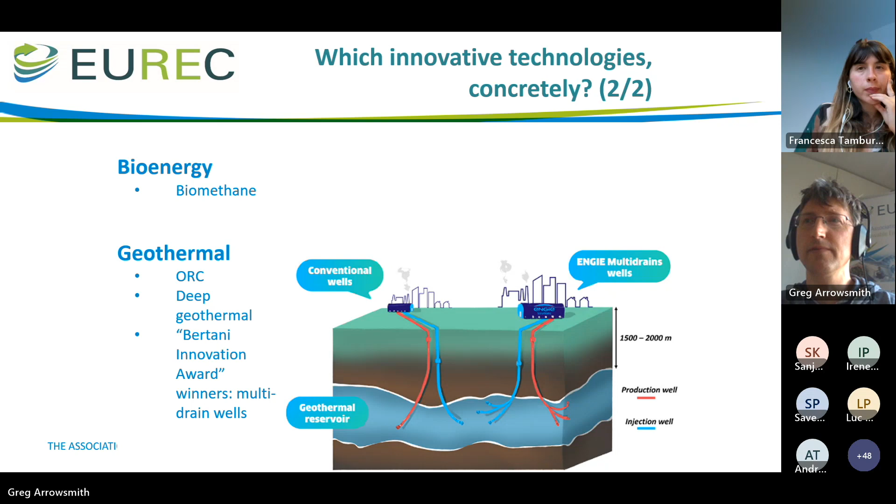A couple of slides to conclude about how we might implement such an innovative target for innovative technology. Well, it requires a lot of monitoring. It requires something like a list of technologies to be drawn up from the guideline that I mentioned at the front of my presentation. I think that member states are going to have to consult their scientific communities on what could fit this definition that the trilogue has thrown up, and then try to push them towards more ambition and not allow too many things to get through the filter.

We have the NECP process that runs every 5 years to come up with a list of technologies this year and next. That's because of a chance bit of good luck with the timing. NECPs have to be redone by June of 2024.

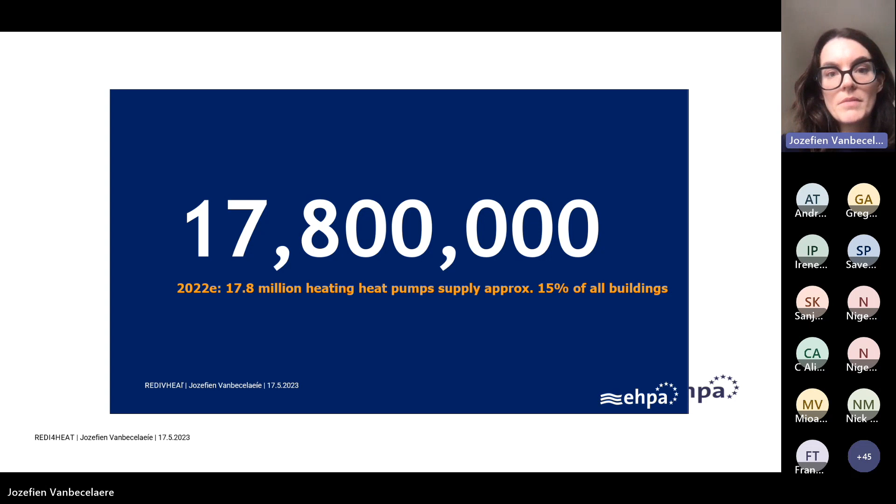2022 was really the tipping point for heat pumps — I see the slides have changed layout a bit, so let's hope the next ones look good. The biggest change we've seen was last year, and that's of course, as you all know, a consequence of Russia's invasion of Ukraine, where the EU, but also internationally, people wanted to reduce reliance on Russian fossil fuels. For example, the IEA made a 10-point plan to reduce the EU's reliance on Russian natural gas, and heat pumps were really key measures mentioned in there.

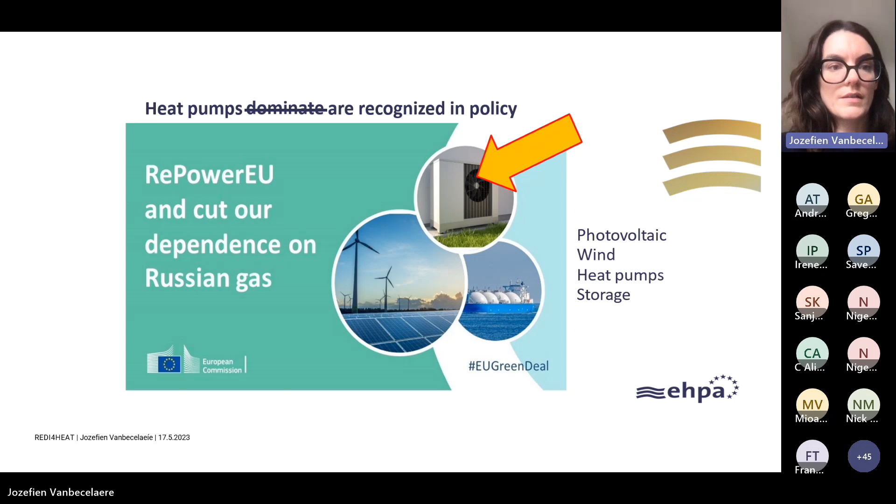The EU reacted with the RepowerEU plan, where for the first time heat pumps were really put in the picture, literally, with ambitious targets and measures. The targets mentioned were to have 30 million additional hydronic heat pumps by 2030. But if we extrapolate this to the whole heat pump market, including air-to-air heat pumps, we would arrive at 60 million additional heat pumps by 2030, which is actually a quadrupling of the current stock. So these are very ambitious targets.

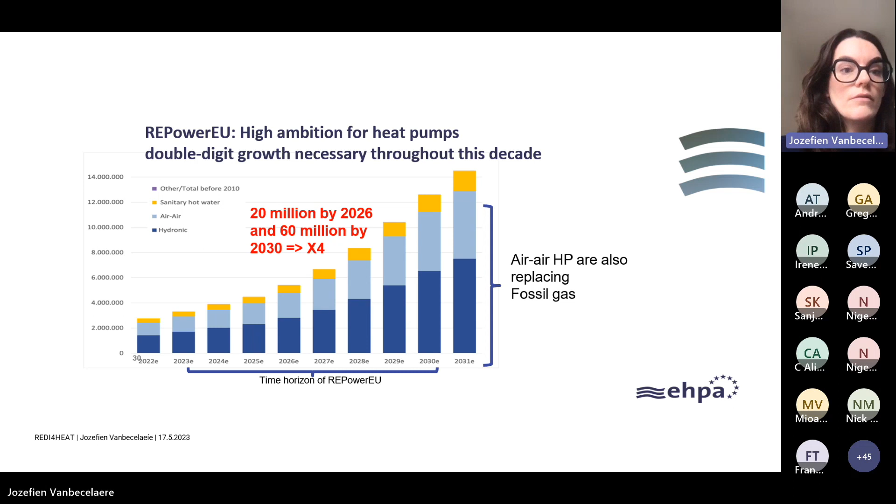If I then go to the Fit for 55 package, we had last year these very ambitious targets, but in the meantime the Fit for 55 package was already ongoing, the negotiations were ongoing. So we have to see these things separately, and see how far the measures included in the Fit for 55 package will actually contribute to these targets, because they were not setting the targets.

The first one is very important for us: the ETS2, the emission trading system for buildings and road transport, which puts a carbon price on fossil fuels used in buildings and road transport. That will enter into force as of 2027, though it can be delayed to 2028. It's very important that the polluter pays principle is more integrated into heating, and that a carbon price is put on the most emitting fuels used for heating. That will make the gap between renewable heating and other heating smaller, and make the business case better for heat pumps. At the same time, a social climate fund will be set up, so money from the ETS will also be used to support vulnerable households to make that shift from fossil fuel heating to renewable heating. That's very important as well.

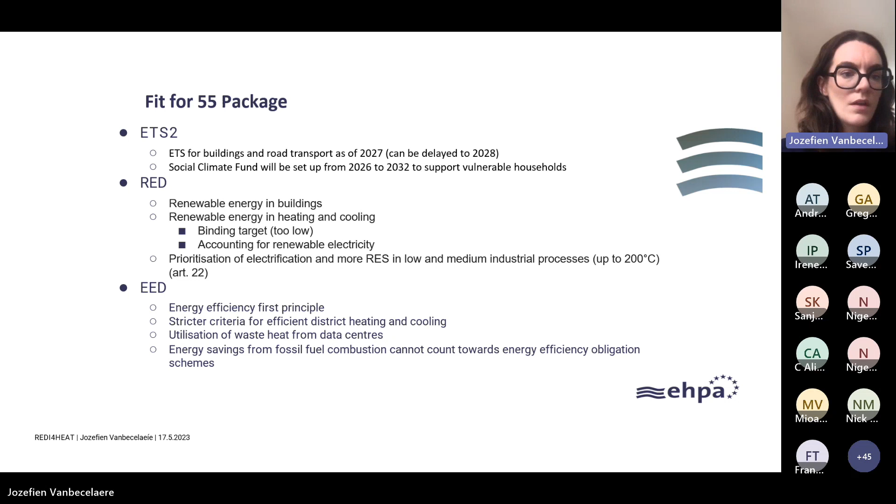On the next slide, of course, a very important file for us is also the Energy Performance of Building Directive. Here the trilogues will start in the coming weeks. And for us, we have 3 key recommendations.

First of all, there needs to be clarity on the phase out of fossil fuel boilers and the rollout of heat pumps, because right now in the position of the Parliament, Articles 7 and 8 mention that fossil fuel boilers certified to run on renewables would not be seen as fossil fuel boilers. For us, this is really a loophole opening to keep installing fossil fuel boilers, because they have some type of label that maybe someday in the future they will use a renewable fuel. This is key that it is taken out, because it would also mean a lock-in of fossil fuels.

Then a second part is to make heat pumps a logical choice in zero-emission buildings. Now, in the zero-emission buildings definition, renewable energy from the grid is seen a bit as a last option, whereas if you really want to stimulate heat pumps, you also need to allow them to use renewable energy from the grid as a driving energy.

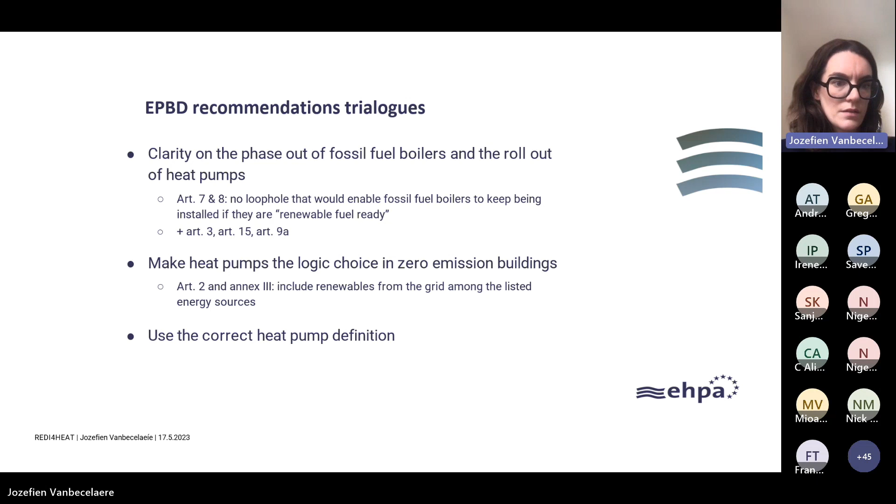And then, of course, use the correct heat pump definition, but that's more of a formality to correct some details in the definition. So these negotiations are starting in a few weeks. That's very important for us, and we are following that up.

As I said, these targets mentioned in the RepowerEU, we really saw that the Commission proposed ambitious targets in the RepowerEU package, with measures spread throughout the 12 documents that were part of this plan. But for us, it was not enough, because if you have such an ambitious target, you also need to show ambitious measures, a clear, straightforward way on how to achieve them, and really concerted action of policymakers, industry, and other stakeholders together.

That's why we proposed a heat pump accelerator focusing on 5 key areas where actions are needed. First of all, clean heating should become the standard with long-term policy signals, really moving away from technology neutrality, but being very clear for investors and also for manufacturers, for example our own members.

Many of them are still producing both fossil fuel boilers and heat pumps. By clearly saying heat pumps are the future or the present already, these manufacturers would shift, for example, their production lines away from fossil fuel boilers to heat pumps.

Secondly, support for the EU industrial leadership is needed. There we see also that heat pumps are taken up in the Net Zero Industry Act, so that's very important as well. Then thirdly, we have to invest in grids and flexibility, and also look at system integration, thinking much more in terms of thermal systems, again to take up this excess heat and not have it wasted.

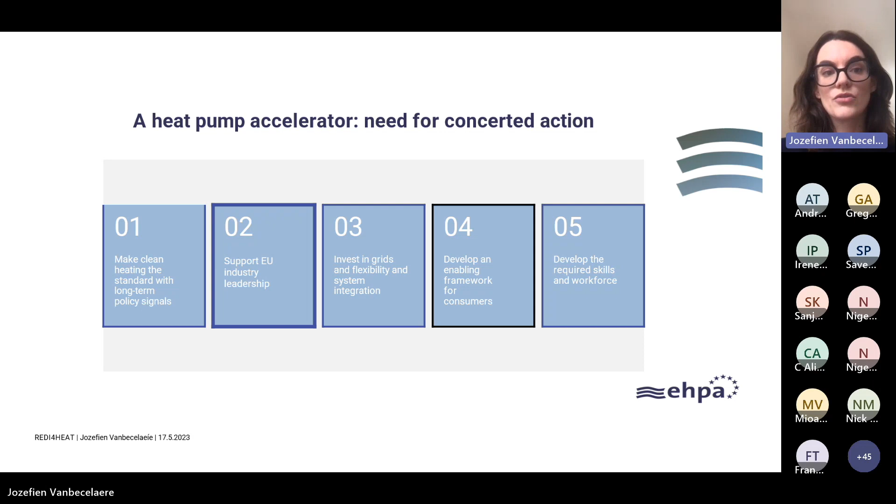But what is very good is that in the meantime, this has been taken up by the European Commission. They endorsed this idea, and they have now developed the idea for a heat pump action plan. They launched the call for evidence on the heat pump action plan a few weeks ago.

The deadline is the 26th of May. Then after that, a public consultation will start in June, running over 12 weeks over the summer. The action plan will be published by the end of the year. So many of the proposals we are making in the framework of the accelerator are now being endorsed and taken up also by the Commission in this heat pump action plan.

That's very good. The launch event, as I mentioned, will be on the 7th of June. On the 6th of June, we have the handover to Commissioner Simson. And then indeed, all these actions proposed there will feed into this action plan also in the next steps of the Commission process. So that was it from my side.

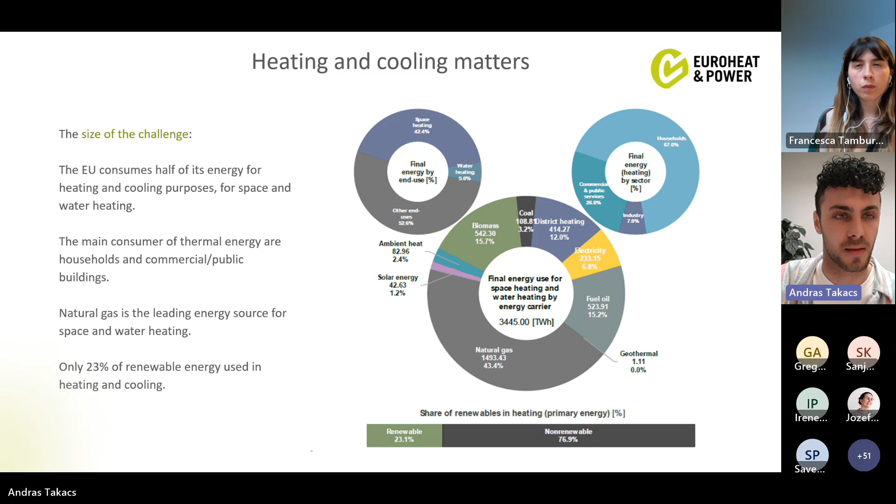About district heating and cooling in the EU, we have more than 10,000 heat networks, and we cover 13% of the EU heat market. We deliver heat to 68 million citizens, and in cities where we already have district heating and cooling grids, we could cover 140 million citizens. So that's a huge number.

As you can see in the picture, district heating is not a technology, it's a solution which utilizes many different technologies. We can use solar thermal, geothermal, and heat pumps using renewable electricity, among many others. Here in the picture, there isn't even mention of waste heat from services, only from industrial plants. So we have many sources we can deliver to households.

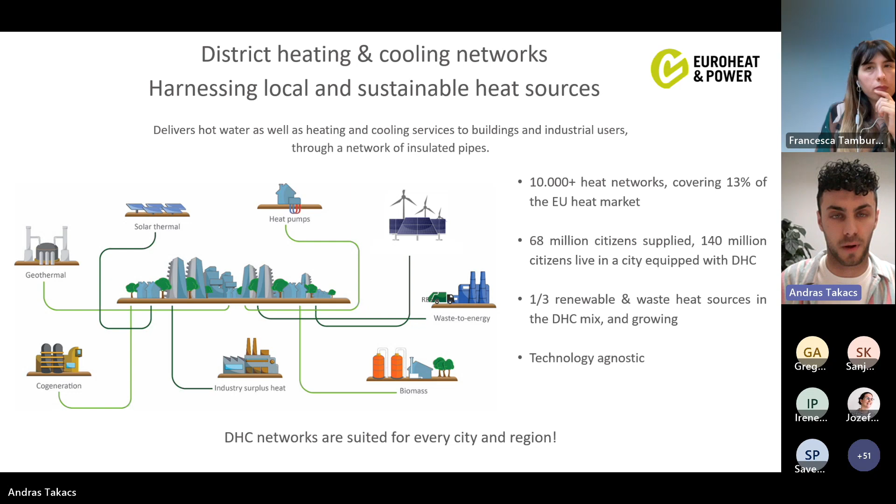As previously mentioned, 1/3 of our energy mix is renewable and waste heat, so we still have room to evolve. For that we have our decarbonisation toolbox, which stands on 3 strong pillars. The first is to recover waste heat from industries and services, and this could provide up to 25% of the future district heating energy mix. Besides that, we can diversify the heating sector using geothermal, solar thermal, and biomethane sources, so the whole heating sector will not stand only on electricity and electrifying the heating sector, but also on different energy sources.

And the third option is, of course, renewable electricity used by heat pumps or e-boilers. Here we have a big opportunity that we could balance the electricity grid and use excess renewable electricity when there is a lot of production, and use that excess electricity by heat pumps and e-boilers and store it in thermal storages.

These thermal storages can store heat for days or even seasons. So, for example, during the day when the sun is shining, the thermal storage will store heat from solar thermal and other electricity sources, because renewable electricity is more produced during the day from solar thermal, for example, and feed it into the district heating grid during the evenings. To do this, to properly use thermal storage, we also need digitalization.

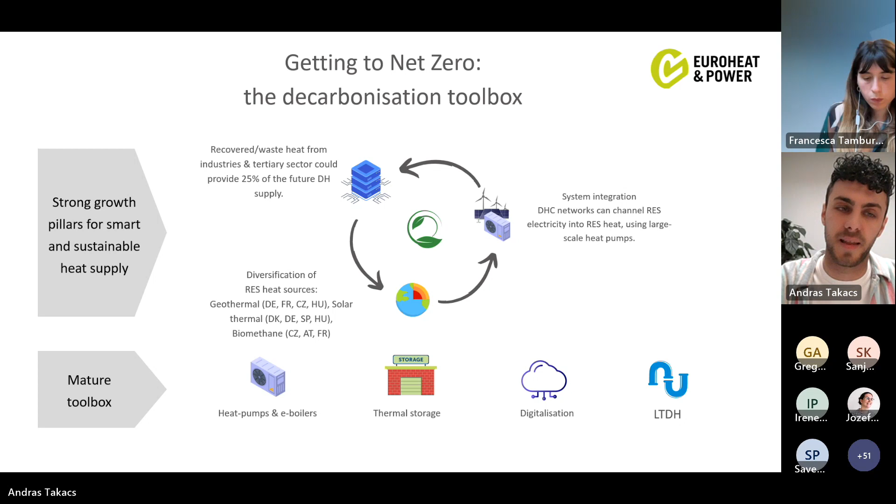And the Fit for 55 package helped us to reach our goals. We had, similarly to EHPA, these four legislations important for us. And as you can see, the EED, RED, and the ETS are already finalized. It still has to be formally adopted, and the negotiations on EPBD will start in a few weeks in the trialogues.

Yes, so I will start with RED, but I will be short because I know that this file is important for all of the other speakers as well.

So besides the overall renewable energy target of 42.5%, we have sub-targets which include not only renewables but also waste, and this is huge for us because we are utilizing waste heat, excess heat, and it will count towards all of these targets. There is a binding target for heating and cooling, which will increase later. Also, there is an indicative target for district heating and cooling, 2.2% yearly. And then, as already Craig mentioned, there is an innovative renewable energy technology target as well, and targets for buildings and industry.

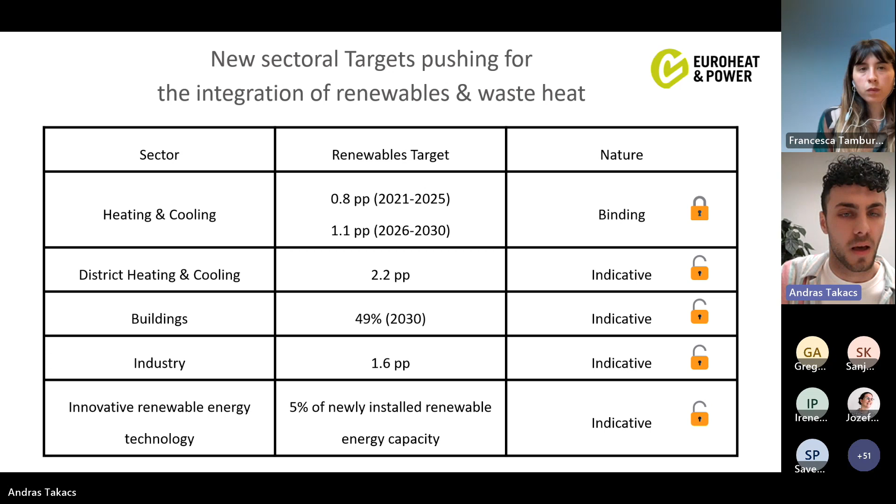So the outcome of the RED was very positive. We are happy with it. There are a few very positive aspects I am going to mention. We are happy that third-party integration is allowed, and network operators above 25 megawatt will be encouraged to connect third-party supplies of heating and cooling. So if there will be a geothermal well close to a district heating network, then they will be encouraged to connect to it.

Similarly, there are broader information requirements for consumers, so they will be informed about the energy performance and the renewable share of the district heating and cooling network, and all of this information will be accessible for them. And as already mentioned, waste heat is very well recognized through the legislation, and it counts towards the targets as well.

So on EED, I will start with the biggest win. From June 2024, comprehensive heating and cooling assessments should be integrated into the National Energy and Climate Plans, which is very good news, because that will mean that heating and cooling will be considered from the very beginning of the planning for the national energy and climate plans.

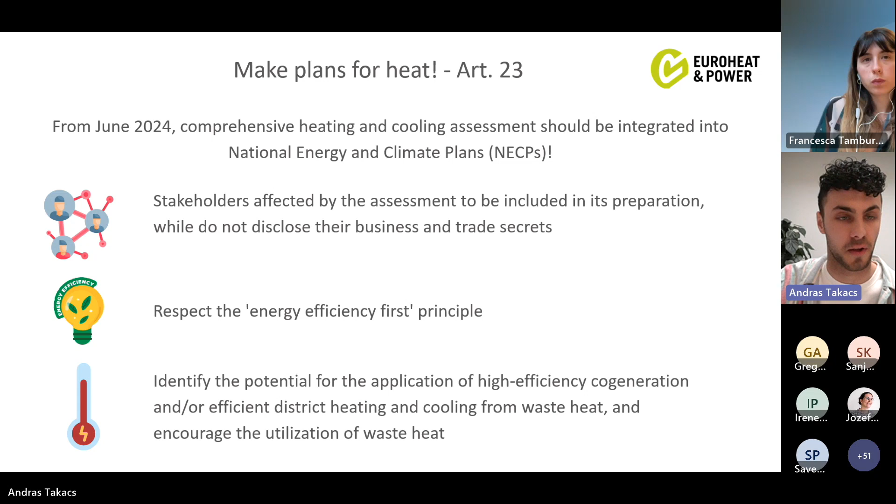Then there is a new article as well, which mandates that every municipality above 45,000 inhabitants will have to develop a local heating and cooling plan, which means that the cities have to map in which areas there is heat demand and what heating sources they have within the municipality.

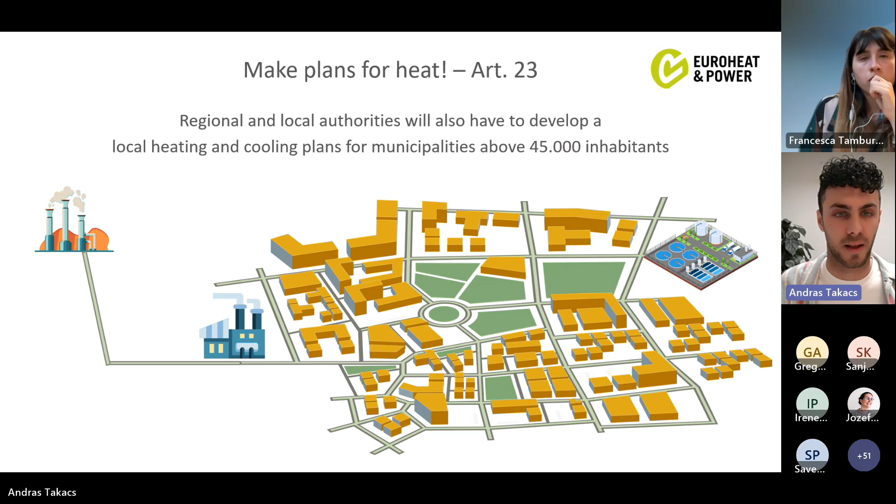So as you can see on the picture on the right, there are urban wastewater treatment plants, which could be used for waste heat, but also nearby to the city there could be a geothermal well, which could be connected to high efficiency cogeneration or a heat pump. So anyway, the city has to map all of these, the demands and also the energy sources they have, and they have to develop these local heating and cooling plans.

And now about the efficient district heating and cooling definition. There are two of them. The other alternative definition is based on CO2 emissions, and may be useful for member states choosing other decarbonization pathways. But the main one sets a clear pathway and targets through up until 2050.

You can see that until 2028, member states can choose all of these three options. For example, if they want to fulfill the first criteria, they have 50% renewable energy or 50% waste heat in their district heating and cooling grids, or they can use at least 75% cogeneration, or they can mix together 50% combined renewable waste heat and CHP.

But from 2028, CHP will no longer count towards the efficient district heating definition, only high efficiency cogeneration. Also from 2028, there will be a minimum share of renewables in the networks: 5% from 2028, rising to 35% from 2035, and that share stays, but the overall share is increasing, which includes high efficiency cogeneration as well. And of course, from 2050, we will run only on 100% renewable energy and/or waste heat.

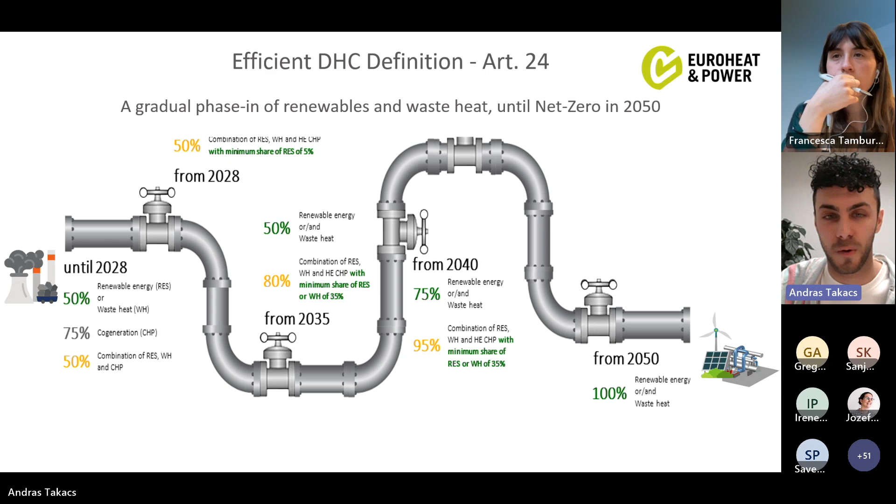So the timeline, just to repeat: from June 2024, comprehensive heating assessments will kick in, and in the meanwhile it depends when the directive is transposed into national legislation. According to Annex 3, cogeneration will have to limit its emissions to 270 grams to become high efficiency cogeneration, though the date here is not completely clear yet.

From 2028, only high efficiency cogeneration can count towards the efficient district heating and cooling definition. From 2031, no new fossil fuels will be allowed in district heating and cooling grids. This means up until 2030, natural gas can be used for new installations, new energy sources of district heating and cooling which are efficient district heating and cooling, but after 2031 it will not be allowed within that definition.

Here I want to mention that there will still be fossil fuel district heating and cooling networks after 2031, but they will not be classified as efficient, and hence will not receive any support from the EU or member states. So this is the consequence of it.

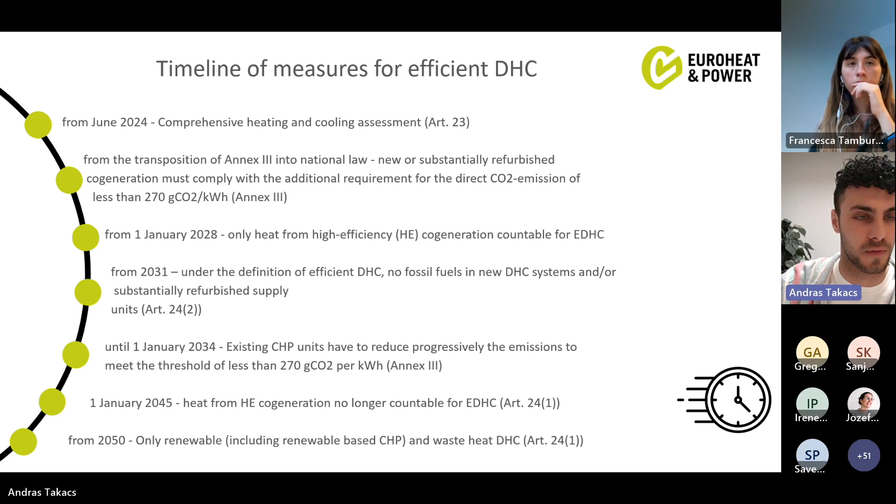I have just one quick slide on ETS. I will highlight that from 2027, fossil fuel combustion in buildings will fall under ETS2, together with road transport. This may be postponed by one year if energy prices are high. Yesterday I checked, the ETS price was 89 euros, so it will probably exceed 90 euros, and this emergency brake will be triggered, meaning ETS2 will only kick in from 2028.

Prices for households will be kept for buildings at 45 euros at least until 2030. This will be reviewed by the Commission every 12 months. There will also be a social climate fund to help, as Josephine already mentioned, households cope with the extra costs. We know this ETS for buildings is very sensitive, and even now with the energy crisis and rising energy prices, households will have to pay higher prices for the heat they receive, but this will drive the decarbonisation of the sector.

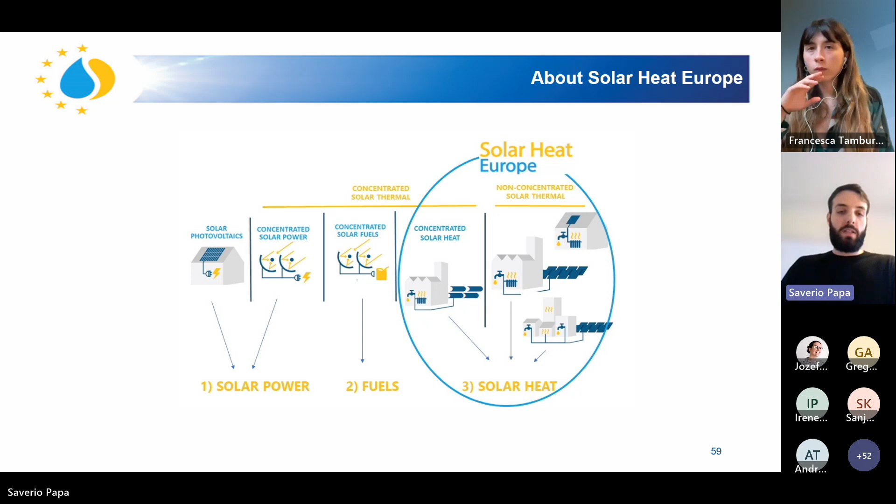We cover both small scale and large scale installations. Of course, the small scale segments are the dominant ones today. We have residential, commercial buildings, and we have over 10 million installations in Europe, to give you a quick reference. But we see that the large-scale installations are growing a lot. They are already present, it's not a niche market, but we see that it's the one that will grow the fastest in the next years. Andras was already mentioning solar for district heating systems, so solar district heating. But we also have solar heat for industrial processes, which is also called SHIP - that's the acronym.

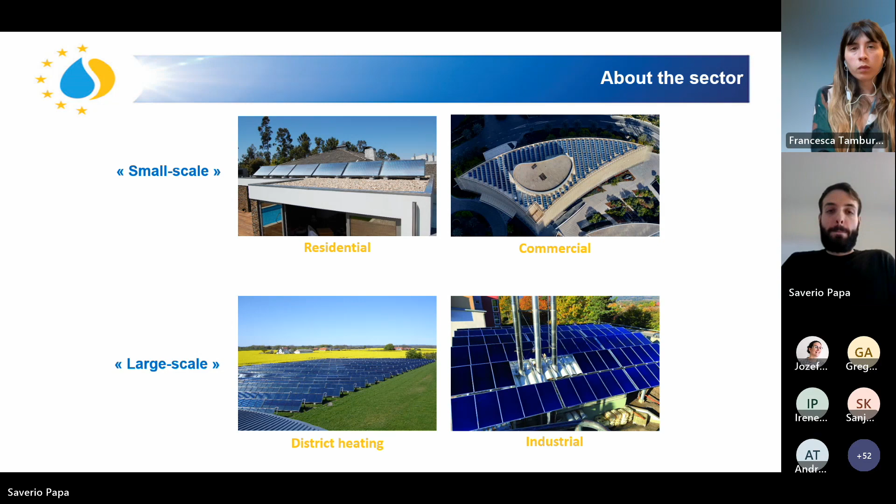Just let me mention two of these figures. The first one is the approximately 20,000 workers in the sector. It's important because Greg started talking about jobs in the renewable energy sector in his introduction. And here I would like to stress that these 20,000 jobs are direct jobs, so in manufacturing. That's why solar thermal has already an established and well-developed manufacturing capacity in Europe. So this figure doesn't take into account all the jobs related, for example, to installation or maintenance, which for several renewable technologies are the bulk, let's say, of the jobs that one technology provides.

And then the other figure that I would like to mention is the thermal energy storage coupled with the solar thermal installations in Europe, which is approximately 200 gigawatt thermal. Why is this important? Because, as already some of the other speakers mentioned, thermal energy storage is a largely untapped potential for Europe. It is not only important because it provides storage, but also because it has a role when integrated in the energy system to provide flexibility, also to balance the electricity grid. So it is crucial that policymakers at EU and national level start considering thermal energy storage as an asset in their policies, because it's also one of the cheapest and easily available ways of storing energy.

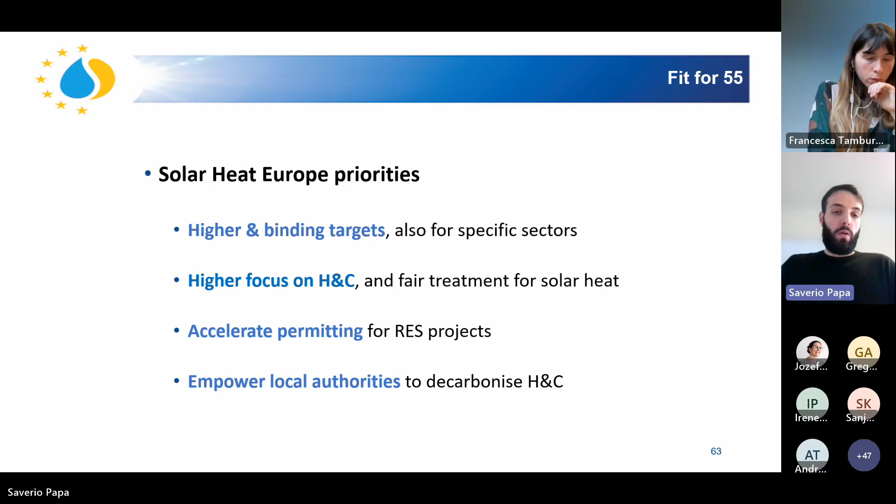The third point was accelerating permitting, which is a major bottleneck for most renewable technologies. And finally, as I mentioned, local authorities are key for heating and cooling, so our fourth priority was to empower local authorities to decarbonize heating and cooling.

As I mentioned, the Fit for 55 package included several proposals. Here I would like to focus on only three of them: the Energy Efficiency Directive, also called the EED, the Renewable Energy Directive, RED, and finally the Energy Performance of Buildings Directive, EPBD. Of course these are not the only important files - my colleagues also mentioned the ETS, which is extremely relevant, but due to time and because the other presenters already said a lot about these proposals...

I will try to just complement what they said and focus on these three, and most importantly on the Renewable Energy Directive. So here, I hope it's big enough that you can see, but it's just to give you an idea of the timeline for these three files.

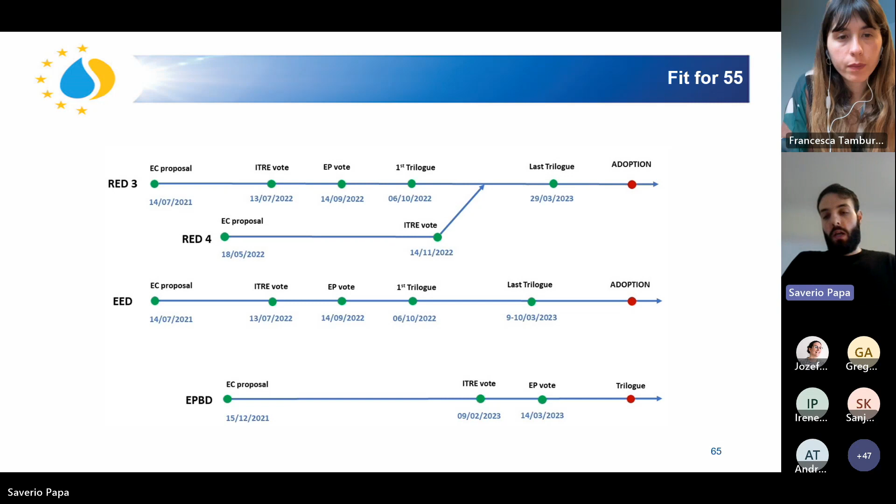The Renewable Energy Directive and the Energy Efficiency Directive proposals by the Commission were published in July 2021, and they moved forward almost in parallel. The Energy Efficiency Directive is a bit earlier, but now we're close to adoption - the trilogue has ended for both files. Whereas the EPBD proposal was published a bit later, in December 2021, so it's at a later stage, and the trilogue is due to start next month, in June 2023.

Here we have the targets for the Renewable Energy Directive. They were already presented by the other speakers, so I will just quickly mention them and focus on faster permitting. We have Article 3 with the overall renewable energy target, which is now 42.5% according to the agreement reached in trilogue, plus a 2.5% indicative top-up.

It is important to say that this is already 10% higher than the previous goal. Of course, we must be ambitious if we want to meet climate neutrality, but also due to the energy crisis and the Russian invasion of Ukraine, the Commission had a further reason, if we needed one, to push for higher targets.

Then, importantly, Article 23 has the target for renewables in heating and cooling. Here, as you can see, between 2021 and 2025, member states will have to put in place a 0.8 percentage points average increase, which will then become 1.1 between 2026 and 2030.

The targets are not that high - they are close to a business as usual scenario, maybe. So they're not very ambitious in terms of quantity, but the very important thing is that it's finally a binding target, which is very relevant to force - maybe that's a bit of a hard word - but force member states to put in place policy measures to meet these targets. Because we have seen that when the targets are indicative, unfortunately some member states tend to underestimate them. So it is very relevant that these are now binding targets.

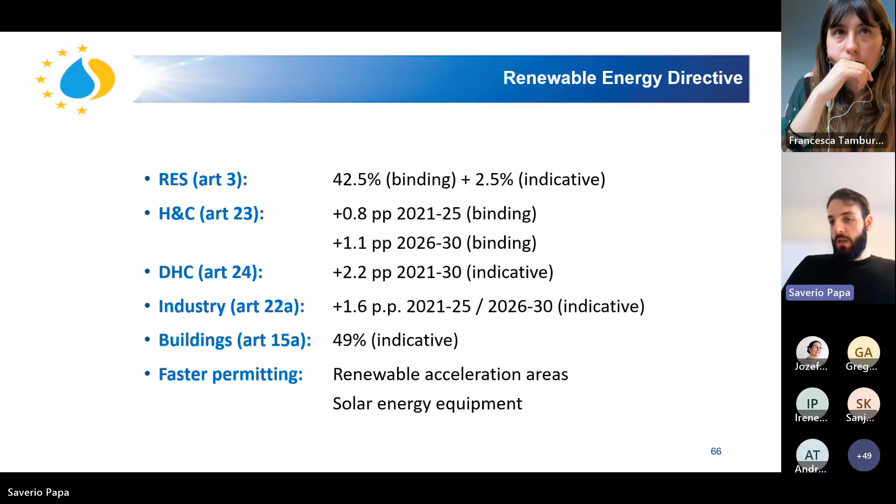I see that we're running late, so I will speed up. About the Energy Efficiency Directive, Article 23 was already mentioned, so I won't go into the details, but I will stress in my last slide why it's extremely important that local authorities are pushed to put in place heating and cooling plans, but also enabled and empowered to do so, because it's not just about lack of willingness most of the time by local authorities, but also a lot about lack of resources, not just financial, but also skills and workers.

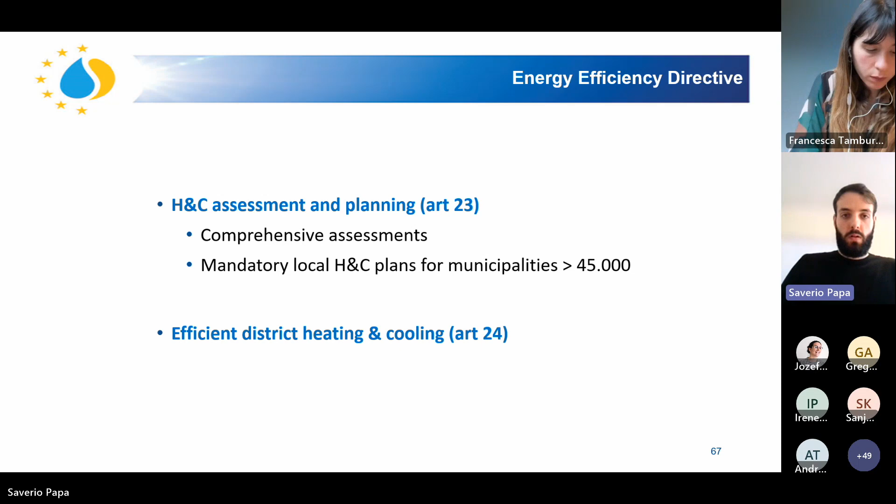One last slide about the Fit for 55 package in the EPBD, and we said the trilogue is upcoming and will start in June this year. Of course, the priority from our side is the introduction of a solar mandate. Article 9A was introduced last year in the proposal for the EPBD recast. Basically, our priority, which is stressed in the Council position and even more clearly in the Parliament position, is that the introduction of the solar mandate keeps the initial intention of the Commission, which is this mandate should refer to all solar technologies, and member states, when implementing the mandate, should ensure

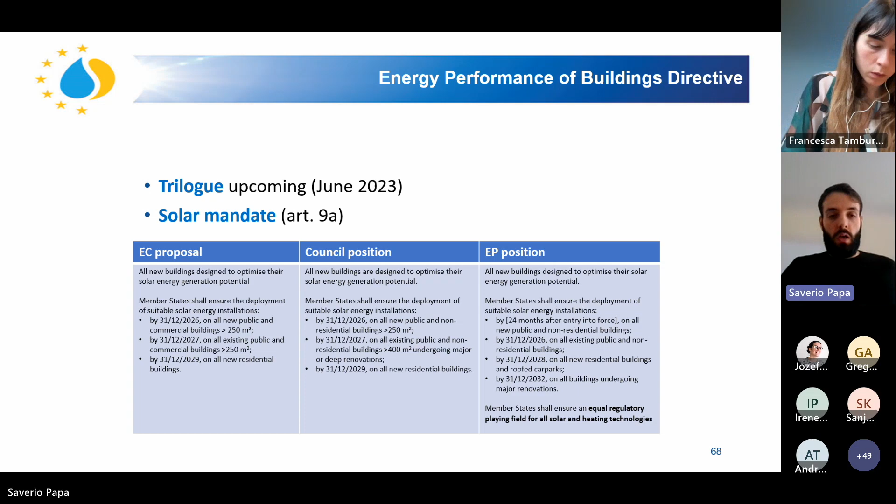...that this mandate allows a level playing field between all solar technologies, which means solar thermal, solar PV, but also the combination of the two, which is also known as PVT.

Why is national implementation key? Of course, first, because it must be timely and correct, and we already covered that. Also because it needs to ensure compliance at national and local level. Indeed, in Article 23 of the EED, which was mentioned, it introduces the mandate for local heating and cooling plans by municipalities, but it also already contained, in the previous version, the requirement for member states to publish comprehensive assessments on heating and cooling.

Unfortunately, we've noticed that not all member states published the updated version of these plans, regardless of the fact that this is a legal requirement. So we must ensure that member states take these requirements seriously and put in place the needed planning to achieve the transition in the heating and cooling sector. The NECPs will be a great opportunity to see how serious member states take this requirement, and whether they are putting in place adequate policy measures to meet the targets, and of course to provide our feedback on this. But I see that we're late, so I'm happy to discuss this further in the Q&A part.

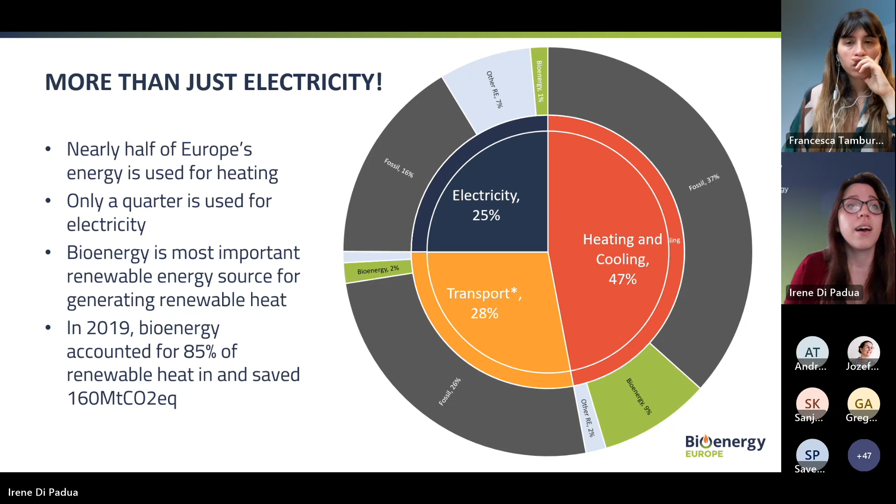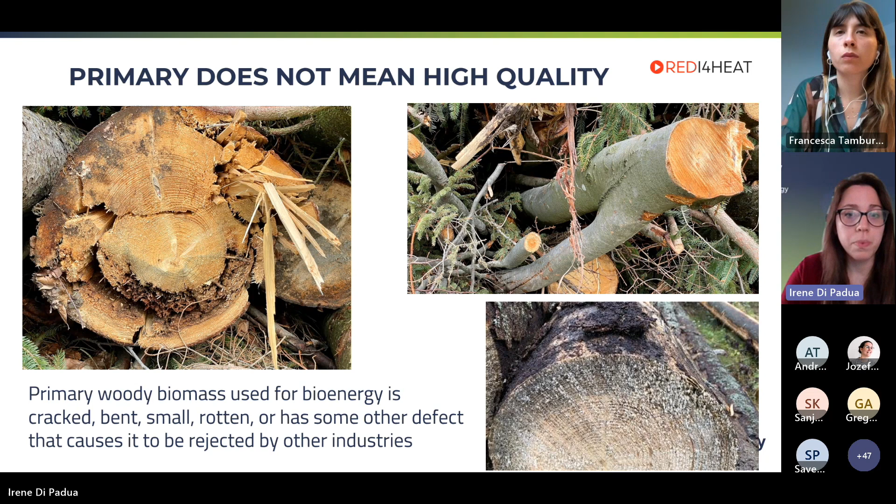But this, as you can see, is wood that is bent, rotten, infested by fungi or other diseases, and therefore not possible to use for any other industry besides bioenergy. In the initial proposal, it did not take into account what this entailed in terms of market numbers.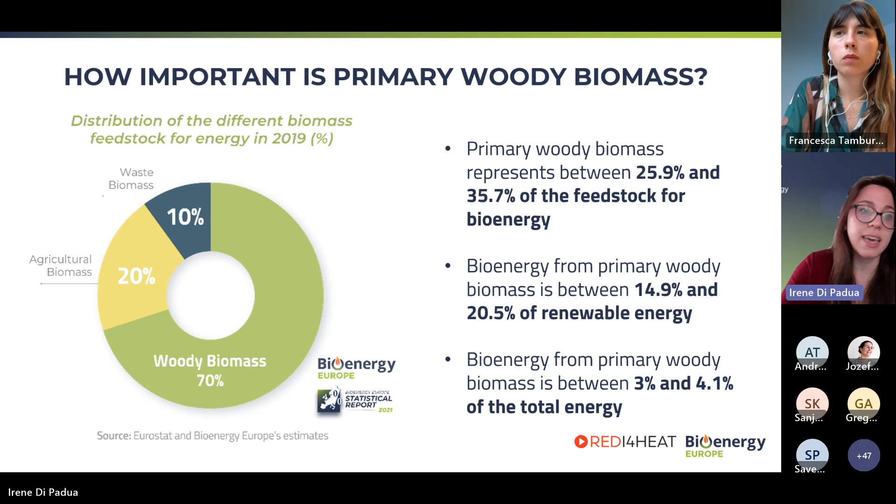So this was quite a consistent amount of feedstock, and luckily this was not put in the legislation. The proposal initially wanted to not consider this feedstock as renewable, not make it eligible for financial support, and so basically not be accounted for as renewable. As I said, luckily this is not in the deal.

But to wrap up, here you can see an overview of the final outcome. I don't know why the slides keep moving, but it's okay. We do agree on most of the provisions that were included. Some will require adjustment because the lower threshold now, before it was 20 megawatt, now it's 7.5 megawatt, so more operators will need to comply with this.

The stricter legislation on cascading will require legislation at national level, so that will depend on how member states implement this. On the no-go areas, that's also good to protect highly biodiverse areas and old-growth forest, a step towards more sustainable sourcing. On forest management practices, it's also a good step forward to have a clear reference and stronger approach. All in all, there could be several files that are important for our sector.

I will not spend time on that today because it would take much longer than 15 minutes. But I'll take the occasion to flag an event we're organizing in Brussels at the end of November, where we'll discuss in much more detail all the things I briefly touched upon today. If you want to know more, feel free to reach out to me and stay in touch. Francesca, back to you.

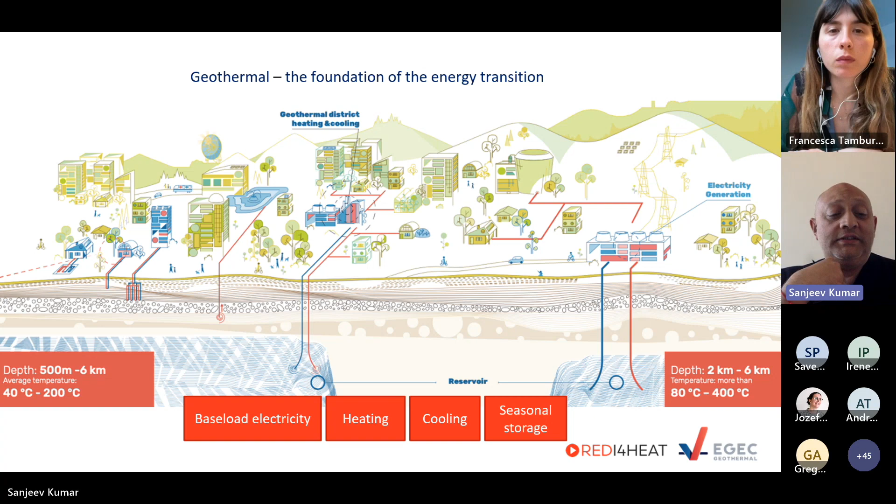Geothermal covers a whole variety of applications, from baseload electricity, heating, cooling, seasonal storage. In some instances we also produce lithium, and in fact one of our plants in Iceland has just found gold, so we're able to extract lots of things very sustainably.

Principally in the heat pump space, geothermal is the energy that's stored below the surface of the earth. We do large buildings when it comes to heating — for example, in the heat pump space, we have the NATO headquarters, the Bundestag in Germany, and of course the famous St. Patrick's Church in New York, where you have the parade for St. Patrick's Day every year.

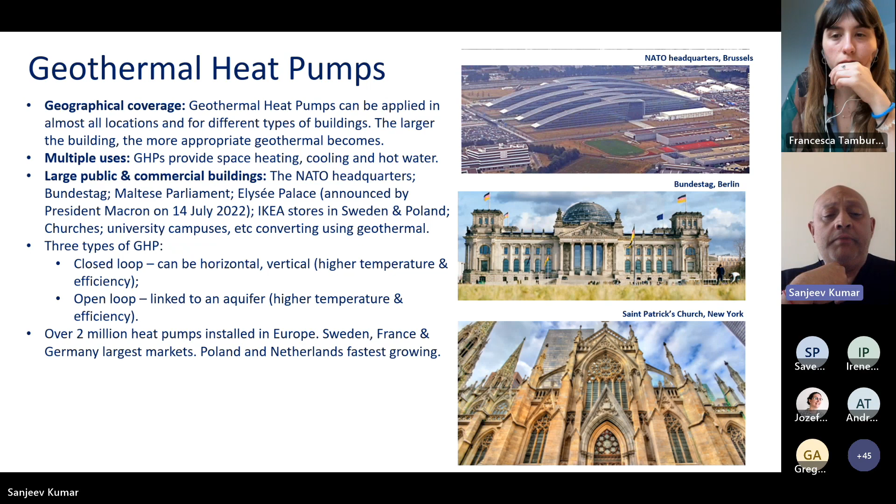There are different types of heat pump applications, from closed loop systems to open loop, where you have slightly higher temperatures because you're using underground aquifers. There are over 2 million geothermal heat pumps installed across Europe, and our leading markets are Sweden, France, and Germany at the moment.

Because everything is below ground and out of sight and out of mind, we have a very low impact — we score very highly in terms of environmental benefits. There's a link here to an article with some civil society organisations and environmental conservationists who are very supportive of this, given its least impact in terms of environment.

And of course, there's a commercial benefit to geothermal heat pumps. In Sweden, a property agency surveyed houses and found that those with geothermal heat pumps sold for 10,000 to 12,000 euros more than those that didn't.

In terms of district heating applications, ADEME, the French Energy and Environment Agency, found that the levelized cost of geothermal — the production of geothermal wells, plus the infrastructure for heating — was 15 euros per megawatt hour, compared to gas, which provides the same service at the same volume for 51 euros.

So geothermal is competitive because of the long lifespans that we operate under. Heat pumps normally have a lifespan of 50 years. District heating we're looking at beyond 50 years, same for power generation as well.

One of the things I want to highlight, which is quite important because it's something we want translated into policy, is one of the developments we see within the geothermal space: looking for business models that don't rely on subsidies. So we've been focused quite a lot on heat as a service, and particularly heat purchase agreements.

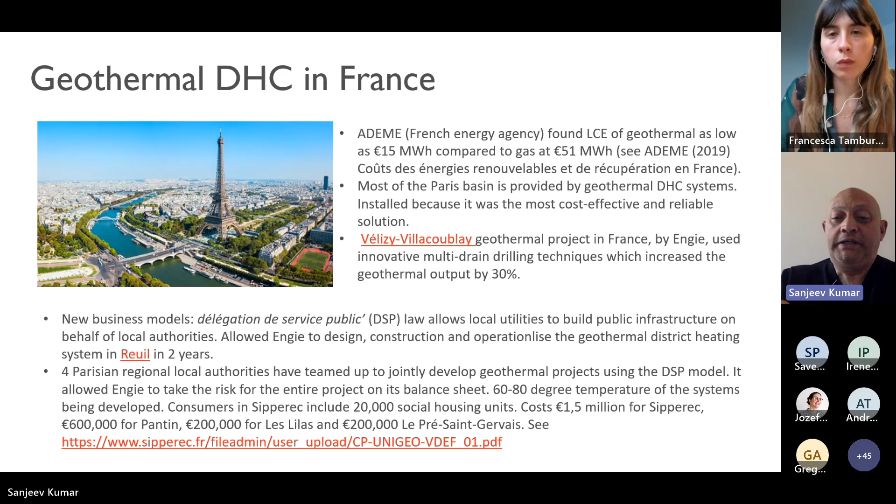And this is something we'd like to see replicated across other parts of Europe. We also have cogeneration, so both the supply of heating and electricity, and sometimes trigeneration, where you have heating, cooling, and lithium extraction.

Two examples here, but the key one is to look at Munich. There you have the first large-scale application of district cooling. This talks to the system efficiency observations we've heard, especially in the chat, in terms of electricity consumption—cooling is increasingly going to become an issue.

My colleagues and myself are going to talk a lot about heating, but let's not forget cooling when we look at the overall dynamic in the energy mix. The key thing to learn here is that Stadtwerke in Munich, because they were so concerned with inefficient cooling systems and applications across different parts of their system causing immense strain on their power sector, rolled out a large district cooling system which has effectively reduced electricity consumption by 70%.

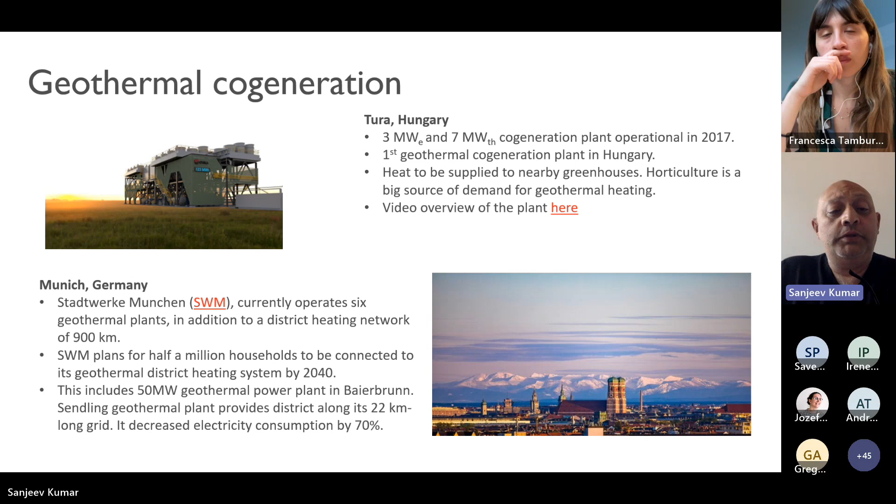This is one of the aspects we would like to see replicated in the Fit for 55 package, but also in the implementation phase as we go forward. One of the other aspects we see quite a lot of, which helps the socially inclusive energy transition, is really legacy fossils. We have two examples here.

Let me give you an example of Heerlen, in the Netherlands, because this is a combination of a heat purchase agreement, local authorities, and how we see the future growth of renewable heating networks. Heerlen was a famous coal mining part of the Limburg region in the Netherlands. There was a plan to reflood the mines—there was very high temperature below ground, and that was enough to supply local authority offices.

Once that was successfully developed, the project developer started looking at nearby residencies, building modules and modules to effectively use a combination of deep geothermal with geothermal heat pumps and other sources, creating a heat network that can gradually expand across the whole town and city. This is bottom-up organic growth, but it's something we wanted to see replicated in the package.

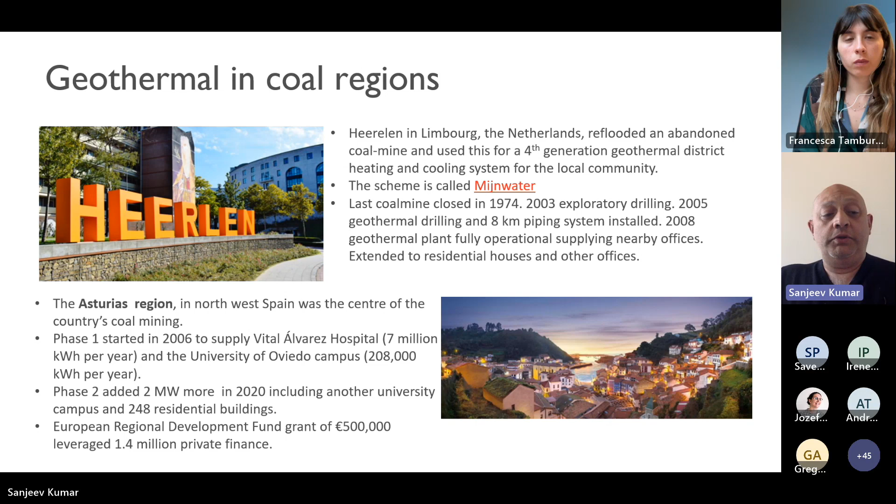Asturias is a similar activity in Spain—iconically the coal heartland of the country. Collectively we're solving the socio-economic aspects of the energy transition, of which heat is the critical factor for citizens. We also provide baseload electricity in 10 member states within the EU, and of course neighbouring countries.

We provide 1% of final electricity consumption, and we're looking to be at 5% by the end of this decade. To put that in context, in 2020, from Eurostat data, the solar PV sector provided 5% of electricity consumption. So we're behind the curve.

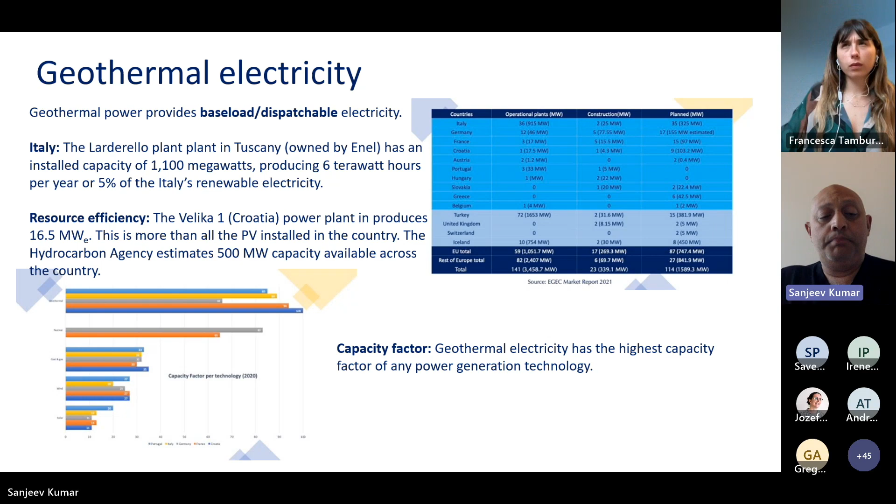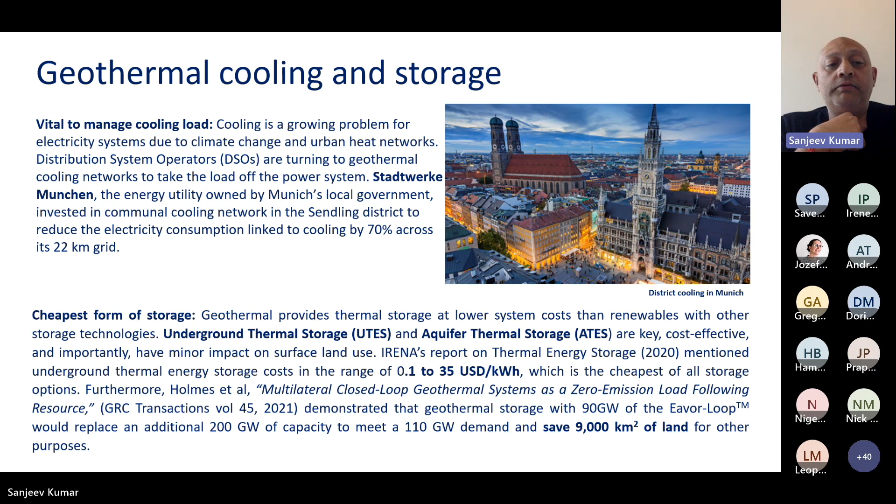In one case in the US and Canada, they found you would save over 9,000 kilometers of land just by looking at underground storage. And I've already mentioned the cooling load. So, you get an idea of what geothermal is.

Let's go through what we really wanted. I've given a few indications already, but we were really keen on making sure there's some form of mandate for local authorities to zone the regions within their localities for renewables.

We know that, as we're seeing from lots of member states who are kind of new to geothermal, this is an example of Charleroi, in the southern part of Belgium, where once member states start to think through it, what are the local resources, sooner or later they will discover their geological surveys.

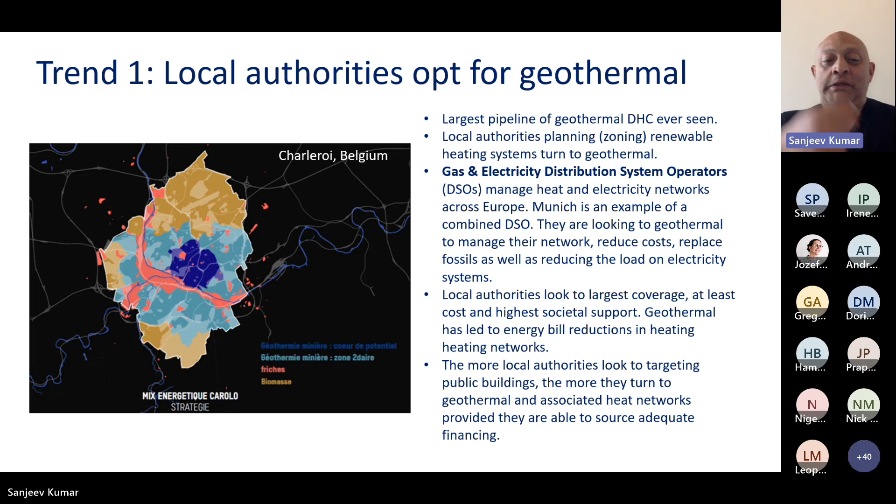And you get to see this kind of zoning done, which gives us a lot more visibility in terms of where we need to be targeting our growth, but also identifying very clearly where we can install and where we cannot install. This is quite important, and we're quite glad that this was picked up by the policymakers.

The second trend we're seeing now is a lot of member states are getting serious about geothermal as they start to look at climate neutrality. We have national action plans in France, Poland, Germany. Ireland has a strategy consultation, and they're going to start the legislation process after the summer holidays. The Netherlands has a hybrid heat pump rollout plan based on a ban of fossil boilers from 2026, open to both air source and geothermal space.

We have countries like Slovakia who are brand new to the geothermal area, looking at the very first cogeneration plant. Slovakia, Croatia, Hungary, really big players that are moving into the geothermal space at a national level to complement the action that's happening below ground.

The other trend we're seeing is that a lot of the agri-food and industrial sectors are now starting to look towards geothermal to address their energy needs, but also to look at cost-effective supplies of energy, so you don't have the volatility of being dependent on fossils. In the Netherlands, for example, greenhouses that produce food, but also those that produce flowers, have been working together to enter into legal contracts, heat purchase agreements, to build district heating, but not for houses, for their agricultural food production.

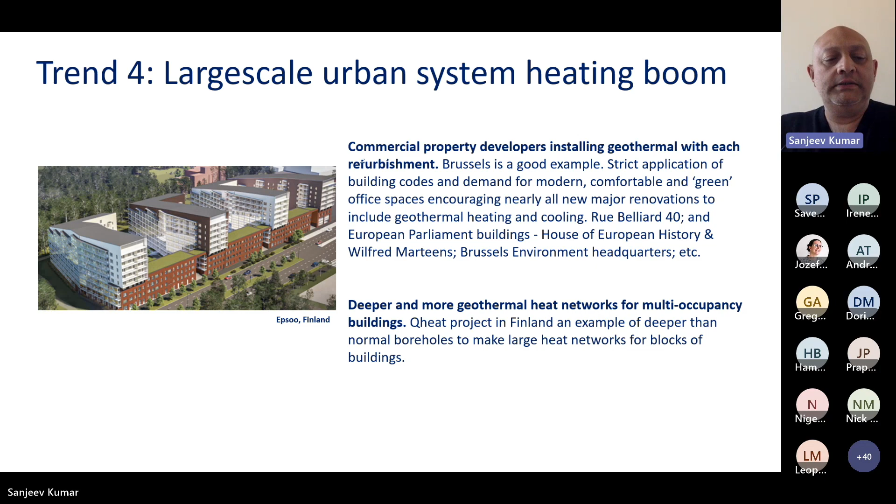We expect this to be a key driver in countries where you're looking at aggregating demand and helping citizens and communities move in one instance rather than relying just on conventional subsidies and information to prod householders to make the investments themselves. So you've got an idea of what the trends are in the geothermal space.

This is what we were looking for in terms of policy solutions from the Fit for 55 package. Firstly, we wanted to reduce the overall capital cost. We are an expensive technology, but we provide multiple services, so it's good value for money over a very long term. We need to find a way in which we can bring down the cost of capital through policy.

Permitting, for us, zoning is a crucial issue. Our sector is based upon maps and looking at geology, but also where one can drill and where one cannot drill. So we were very keen on having a traffic light system for permitting, and we're very delighted that that was adopted by the policymakers.

I've just heard some terrible news a few minutes ago that the Renewable Energy Directive will not be discussed today in council. That meeting has been stalled. So there's going to be some really terrible politics coming in the last minute, but there's really, really good things that have come out of this one.

In terms of business models, I mentioned before, heat purchase agreements. We're also looking at ways in which we can address risk and also find high temperature resources, so that the higher the temperature, the more you can use them for much larger heating needs, but also power generation and cooling as well.

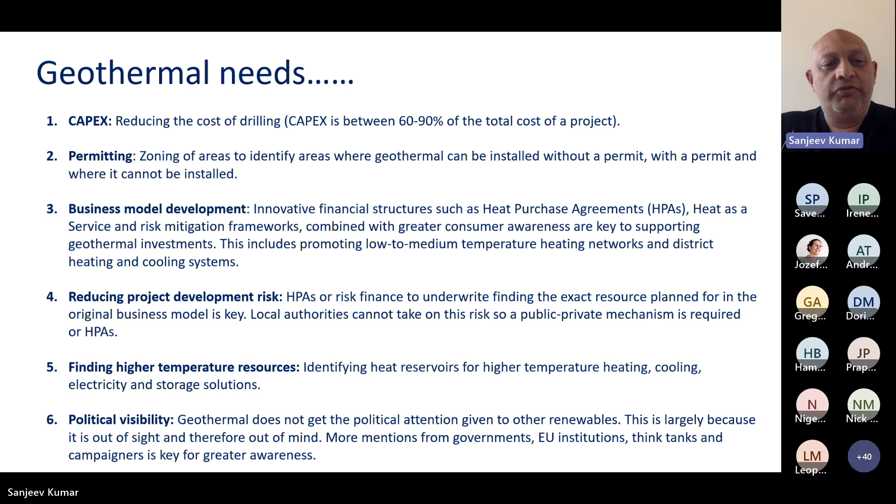Last but not least, geothermal is one of those technologies which nobody really knows about. Statistically, we've lost a lot of time compared to other sectors. So we're very keen to get a mention of geothermal, even the smallest reference to it, in any legislation, but also in communications from our politicians. We're starting to see think tanks and the wider community looking at geothermal much better than before.

This is my last slide, and within this I want to go through what we've delivered in the 4 areas that were quite crucial for us: market creation, permitting, electricity and finance.

Electricity is mentioned here because we talk a lot about electrifying heat, and to do that you need to have abundant supplies of renewable electricity. So that's one of the spaces that we play into.

In terms of market creation, we have a de facto target to triple the capacity of geothermal. This was placed in the EU solar strategy for convenience's sake, but it's there, and we're now working through with member states on how to actually start to deliver this.

We wanted to have some form of a target for heat pumps. We're very happy that in RePowerEU there's a focus on hydronic heat pumps. So this is our cousin Jozefien's ambient heat pumps, but it's also geothermal heat pumps as well. We're looking at heating up water within residential buildings. It's quite a crucial thing for us.

We are very supportive of the heat pump accelerator. We are part of the heat pump sector. So, like Jozefien, we're very excited, and we really appreciate the excellent work that she and her team have been leading on.

We were very keen on the local authority mandate, as you can see from the example in Charleroi. We really want this replicated across. There's two things to note in Article 23 of the RED and Article 23 of the Energy Efficiency Directive. There is a slight tweak in the local authority planning: the local authority planning in the EED is focused on local energy resources, whereas in the RED it's local renewable energy resources. That's one of the things we want to try and help develop with member states.